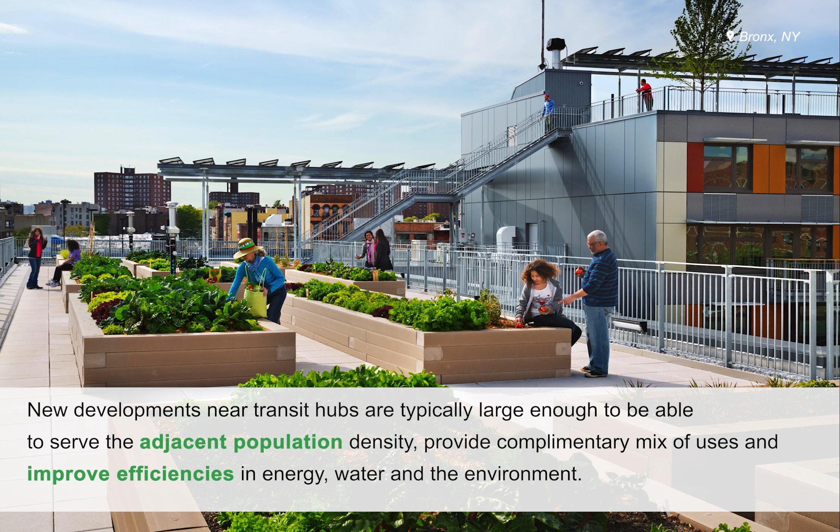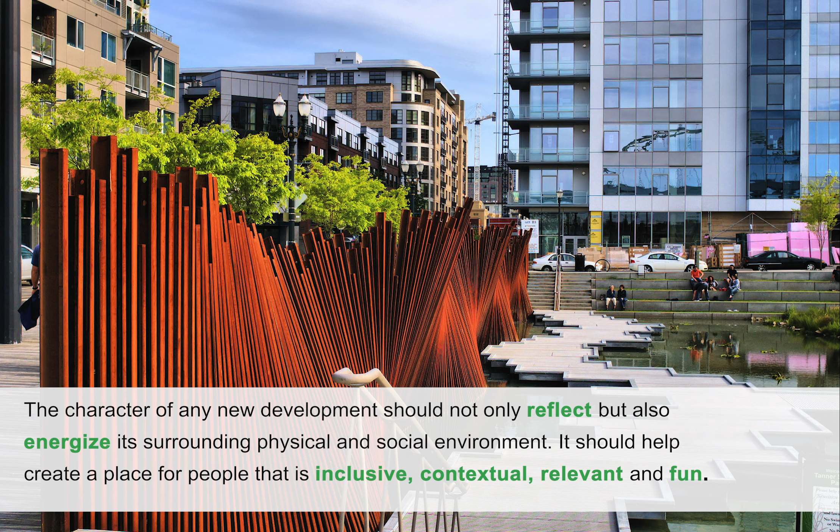These areas can be designed compactly, mixing uses in order to save energy and water, and can house riders and provide them and others in the community with a mix of services and amenities that they need for daily living and special occasions. New development, wherever it's located, should improve the physical, economic, and social environment. It should serve and include the full range of people that already live nearby and welcome others.

The two primary processes that regulate the use of land in our communities are planning and zoning. In planning, cities and counties describe their visions for the future, set goals for future actions, and establish policies and implementation programs to make desired changes happen. Zoning complements planning and includes a set of more detailed land use tools that regulate development on specific parcels of land.

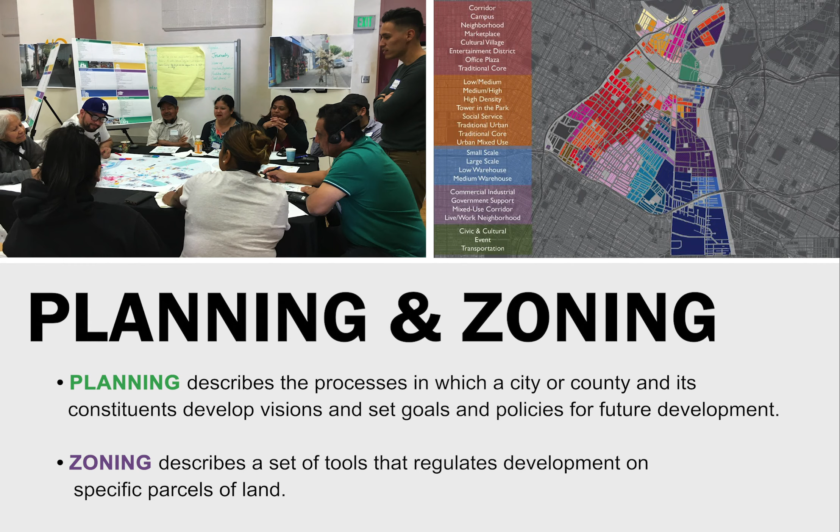Cities and counties in California are required by the state to adopt general plans. These long-term plans serve as the local government's blueprint, guiding the community's vision of future growth. By law, the general plan is required to be updated periodically. While there's no requirement for precisely how often the general plan should be updated, the planning period has traditionally been 15 to 20 years. Each of the 9 or more elements of general plans can be updated individually.

California law mandates that local jurisdictions' general plan elements address land use, circulation or mobility, housing, open space, conservation, safety, noise, environmental justice, and air quality. Some jurisdictions also choose to address subjects like community health, equity, and economic development in their general plans. Next, we describe a few of the backbone elements of the general plan in more detail.

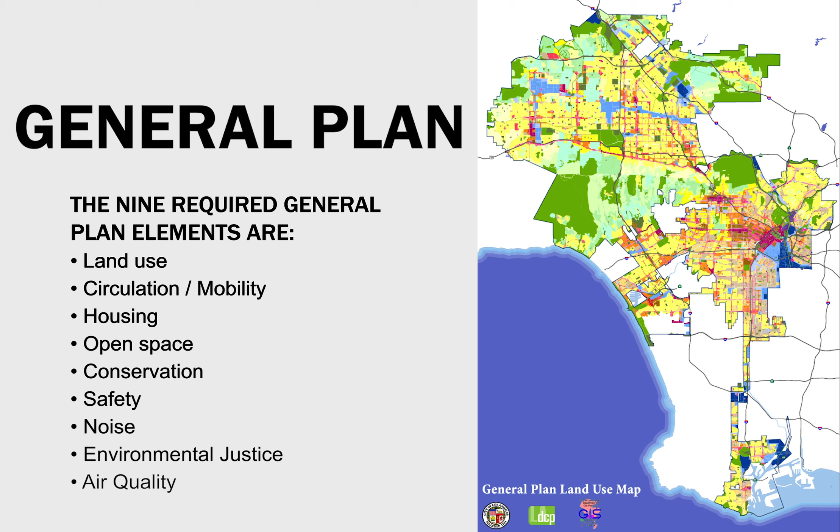The land use element of the general plan must depict the general distribution, location, and allowable intensity of use for all land uses including housing, commercial and industrial land, open space and conservation lands, parks and public facilities, and agriculture lands. The designation and mapping of these land uses is based on the shared vision of the community's future.

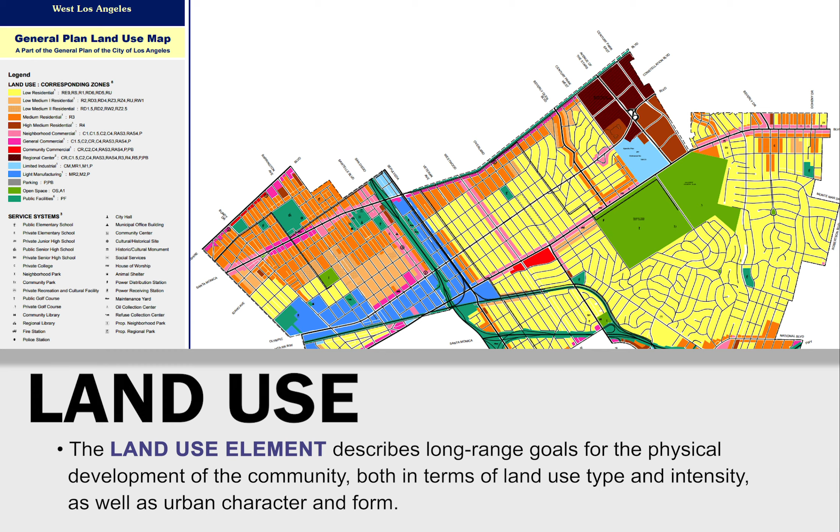The open space element of the general plan identifies land that is generally undeveloped and may provide value for recreation, health, habitat, biodiversity, wildlife conservation, aesthetics, economy, climate change mitigation and adaptation, flood risk reduction, managed natural resources production, agricultural production, and protection from hazardous conditions.

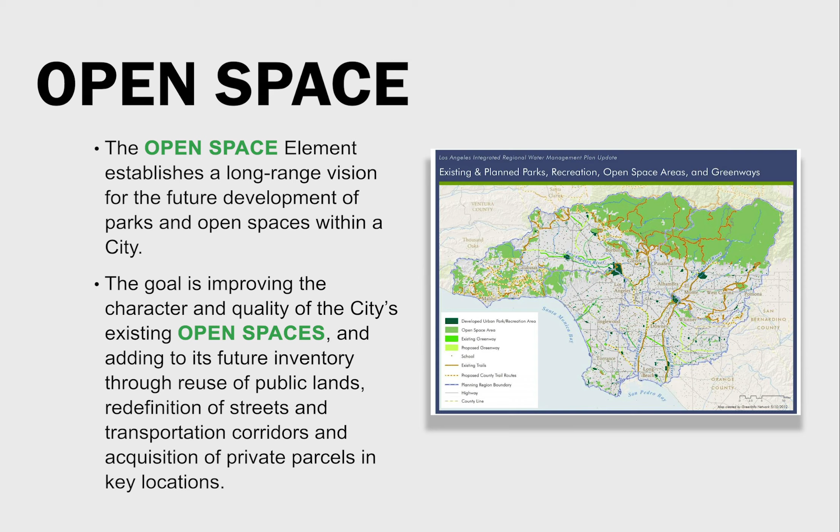The housing element of the general plan implements the state law that the availability of housing is a matter of vital statewide importance, and the attainment of decent housing and a suitable living environment for all Californians is a priority of the highest order. The law requires that the State Department of Housing and Community Development, HCD, review and certify the housing element and that local jurisdictions submit annual progress reports. The housing element must be revised and submitted periodically on a 4, 5, or 8-year cycle.

As part of the housing element, jurisdictions must address the production of housing that is affordable for households that are at and above median income, as well as those that are low, very low, and extremely low income.

The mobility element supports connectivity in complete communities by describing access to a range of mobility systems and choices, including buses and trains, cars, walking, biking, and rolling on other wheeled devices. Newer mobility choices are challenging the traditional idea of streets as mostly places for cars and buses. This is causing new challenges for planners to accommodate increasingly popular modes of travel, including skateboards and scooters, which may not easily fit either on sidewalks or in streets.

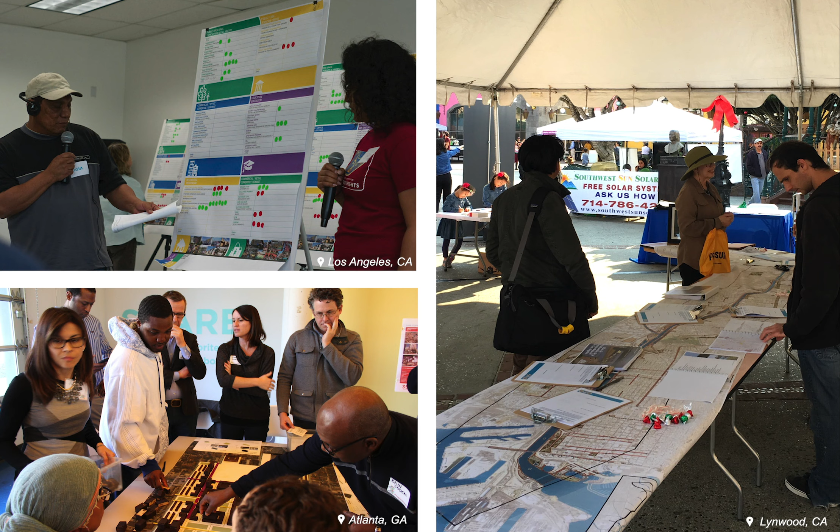In addition to mandating that a range of topics are included in the general plan, state law also requires the local planning agency to provide opportunities to involve the community. The law also requires that a jurisdiction make a diligent effort to include all economic groups when drafting, adopting, and implementing its housing element. While state law requires stakeholders to be informed about the process, many communities choose a deeper engagement by involving, collaborating with, or even empowering stakeholders to participate.

Fine-grained planning for specific areas or communities within a city or county's general plan can be addressed by community plans. For example, the city of Los Angeles, at roughly 500 square miles in size, has 35 community plan areas, each of which is a part of and must be consistent with the city's general plan.

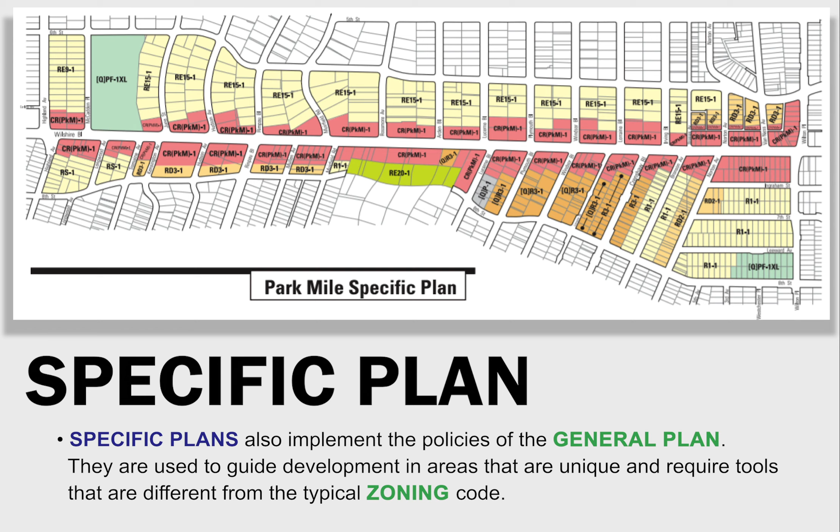Specific plans also govern smaller, unique areas within a city and must also be consistent with the city's general plan. Specific plans are different from other plans because they include both planning and zoning tools, which are usually found in separate documents. In addition to setting out a vision and goals for an area, a specific plan must address land use, circulation, and infrastructure needs.

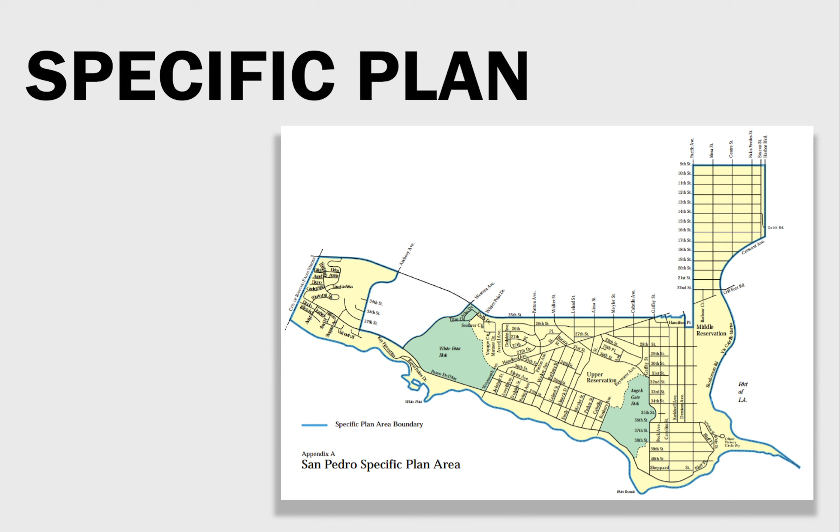Specific plans come in many different shapes and sizes. Some cover a neighborhood, others focus on a length of street, often called a corridor, while still others focus on the area around a transit station. Design guidelines may govern land use, such as those adopted in the city of Los Angeles to guide commercial and industrial development, urban design, architectural design, or even the design of complete streets.

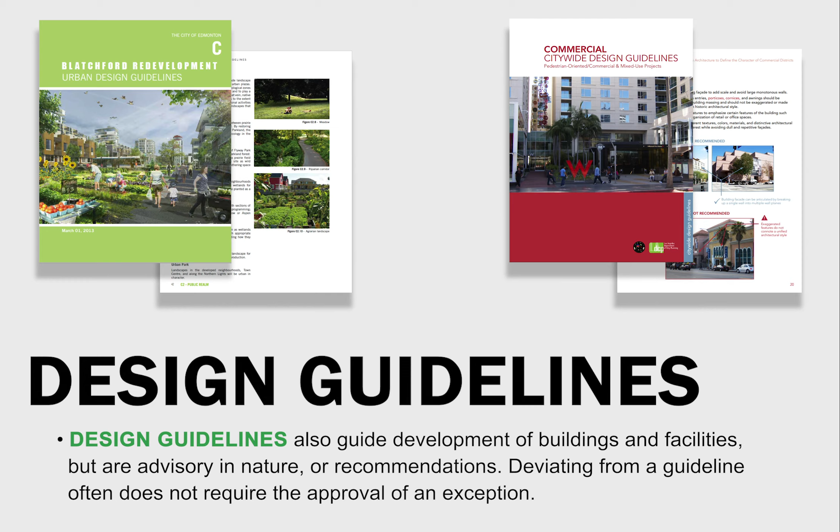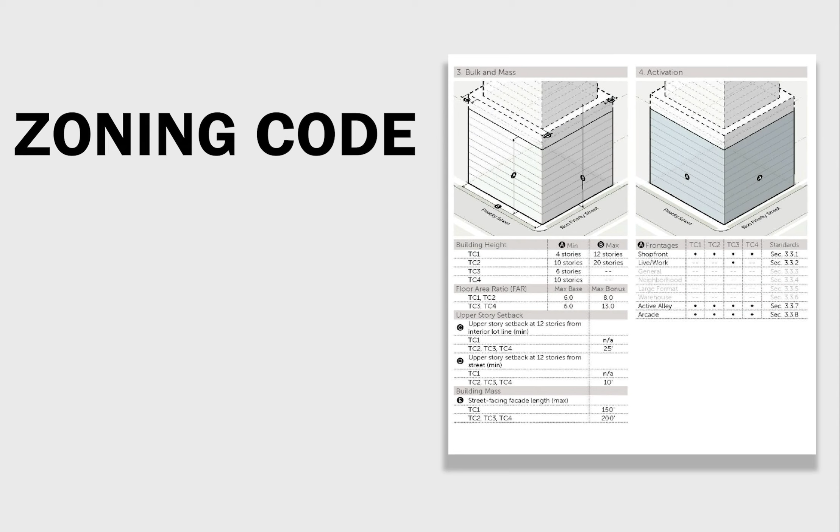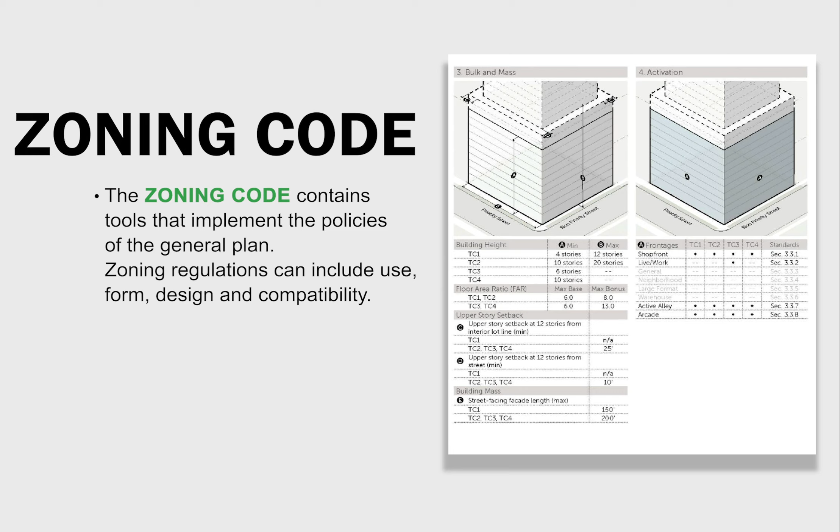The zoning code is an adopted part of the city's overall municipal code or local law. Zoning implements the goals of each of the more specific land uses in terms of uses, form, design, and compatibility. Zoning must be consistent with the general plan. Zoning designations address a range of development standards which traditionally combine to define one zone of land use.

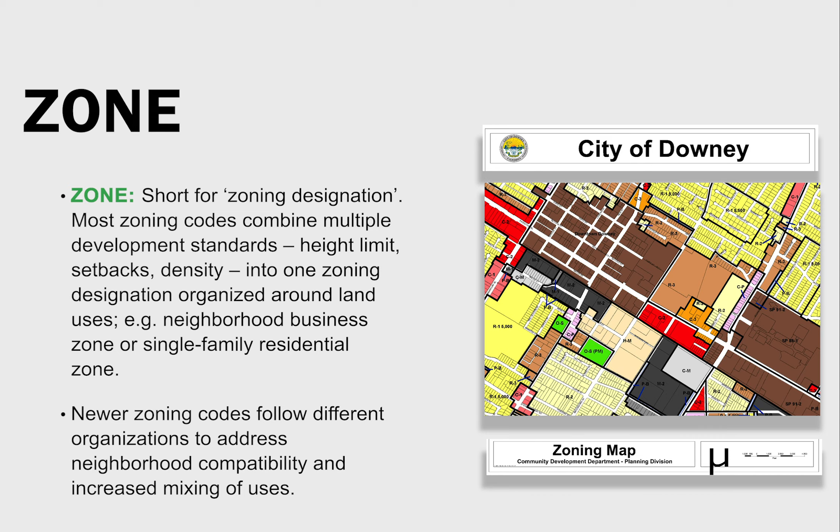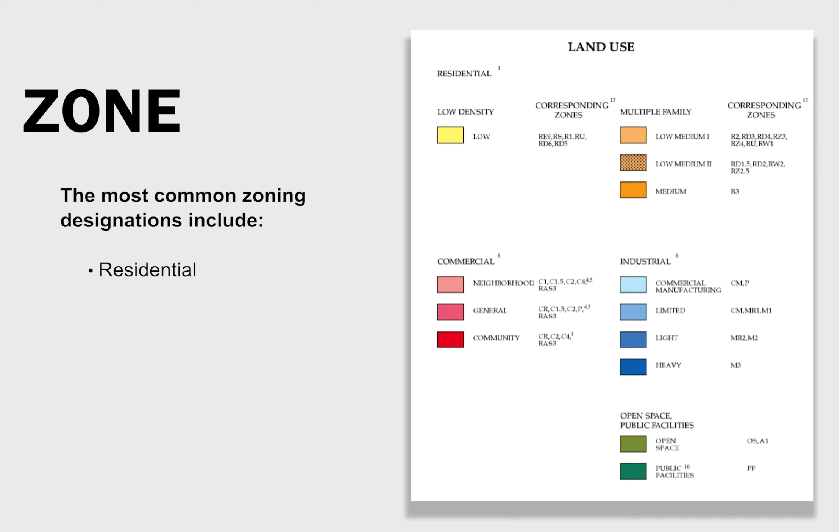New zoning codes sometimes address elements other than land use and density, such as the form that development should take, increased mixing of uses, and the way that development should relate to the street. Each zone or zoning designation in a city's code corresponds to a land use designation in a city's general plan. Zoning can address the range of uses, including single-family and multiple-family residential, commercial, industrial, public, and open space uses.

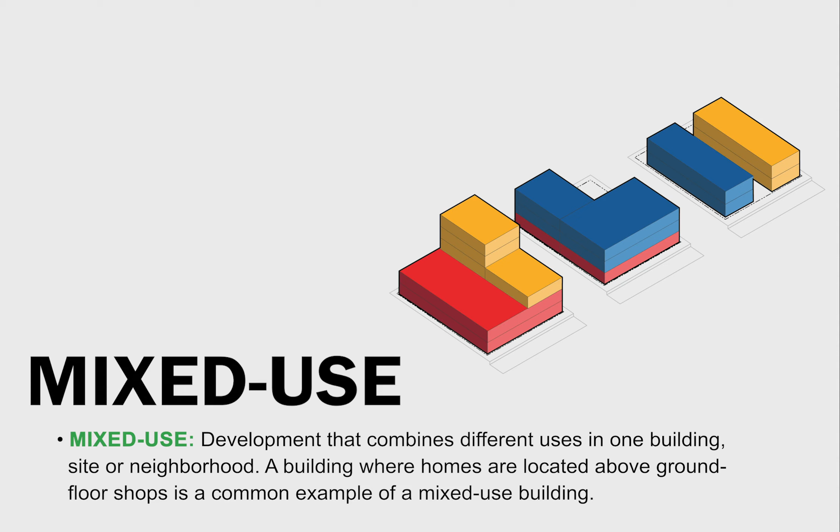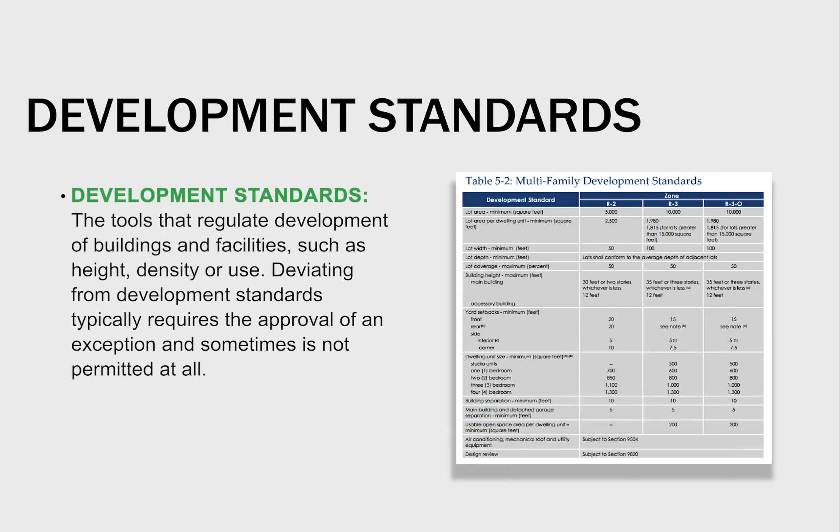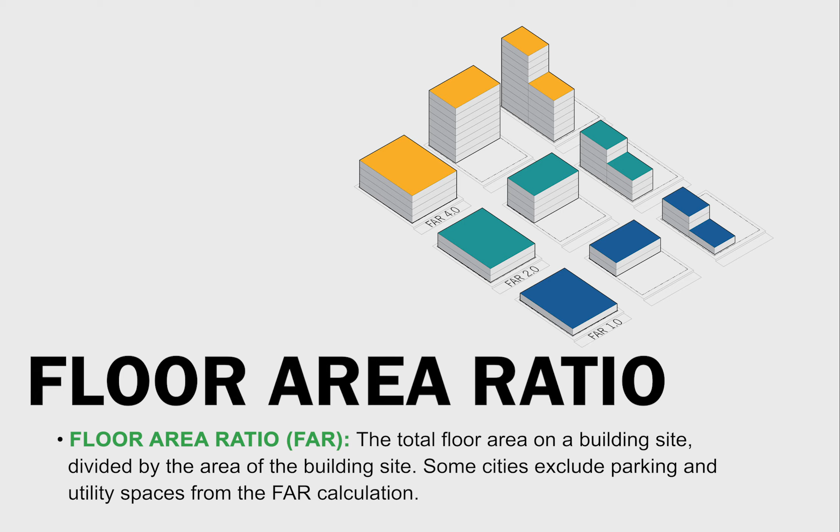Residential density is a term used to describe the number of homes allowed per each acre of land. Residential densities range from single-family density zones, which allow one dwelling unit per acre or per lot of a certain minimum size, to multiple dwelling unit zones, which can allow a wide range of dwelling units per acre.

A recent California law has taken effect that creates new opportunities for accessory dwelling units, also known as ADUs, backyard homes, or granny flats, to be built on residential properties. An ADU is a dwelling unit with a full kitchen and bathroom, which is an accessory use to a primary or main single-family residence and may be rented separately from the main residence.

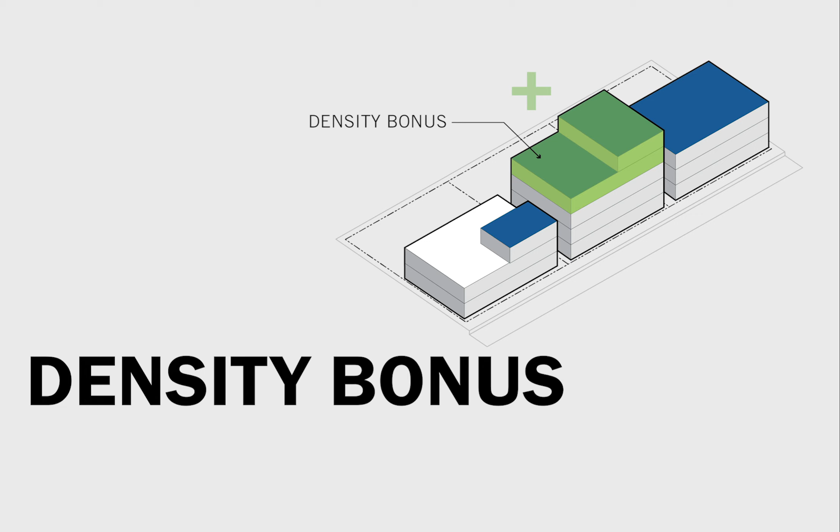To support the creation of a variety of housing, state law also requires that residential density bonuses are provided. Density bonuses provide developers the opportunity to build some percentage more housing units than is allowed by zoning if some of the housing being built is sold or rented at rates affordable to lower-income households, or if the housing is built for senior households.

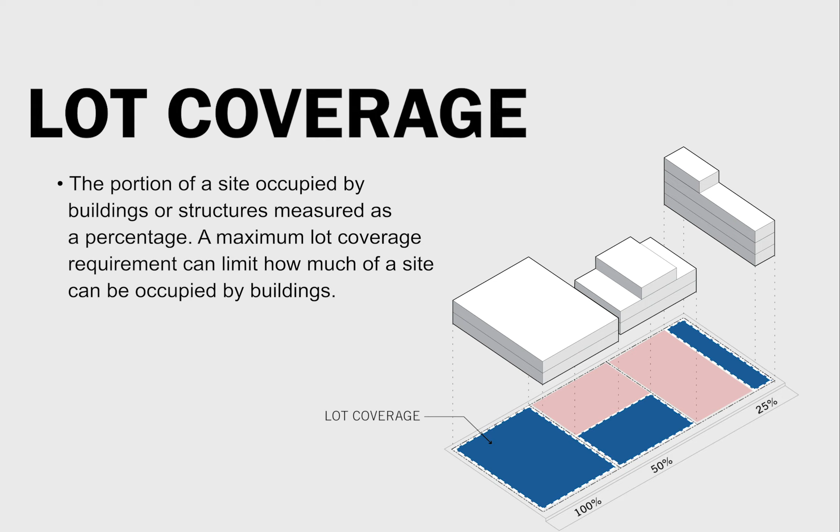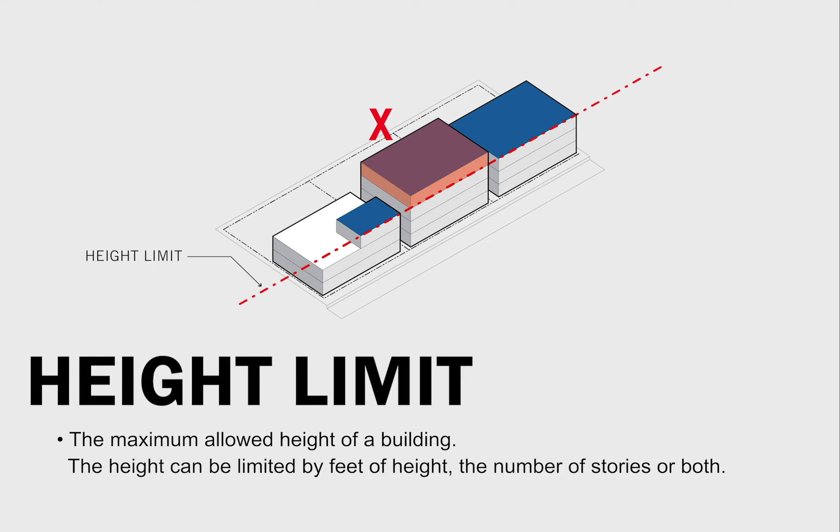The zoning code can also regulate lot coverage, or the percentage of a lot that may be covered by a building. Height limits in zoning codes identify the maximum allowed heights of buildings in various zones. A setback requirement is the distance a building is required to be set back from the property line or another structure. The setback area may also be called a yard.

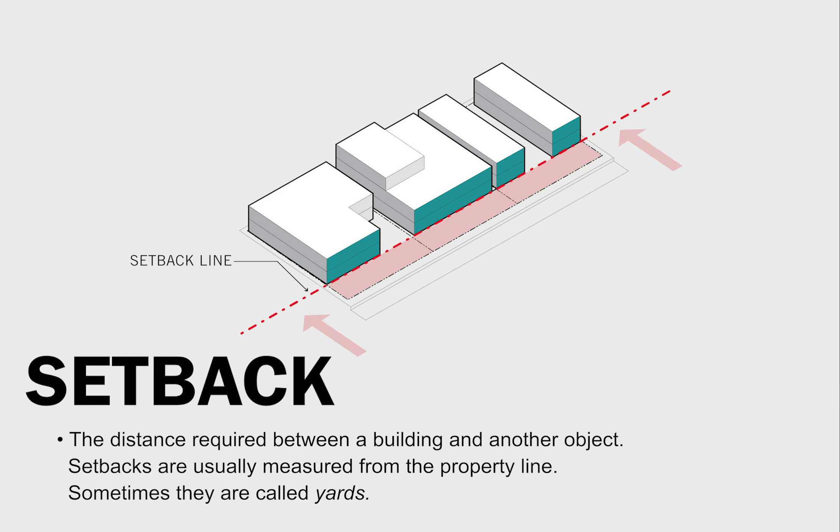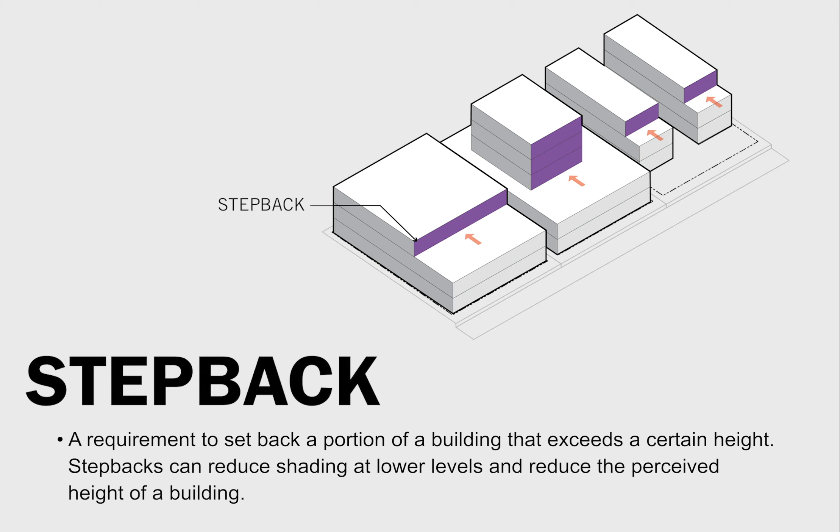A step back is a requirement to step back portions of the buildings on upper floors from the edge of the building, as shown in this illustration. Step backs can reduce shading and visual impacts at or near street level. The term building footprint refers to the area of the site occupied by a building.

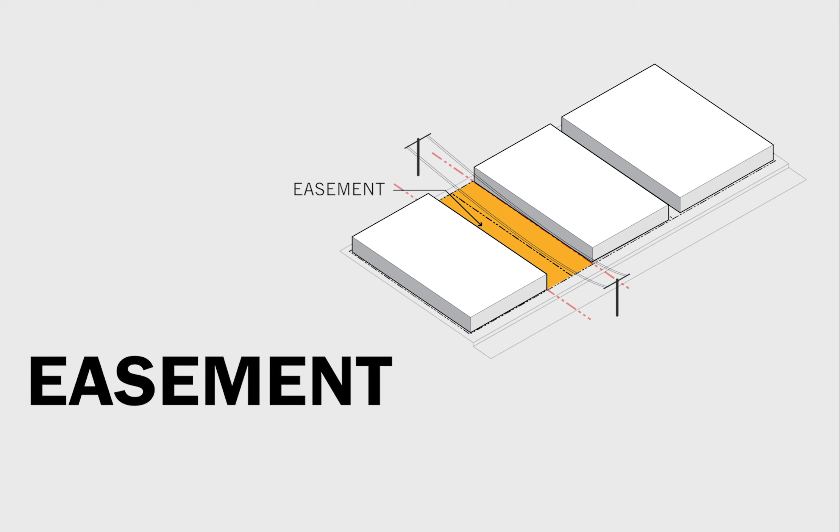Finally, while not necessarily part of the zoning code, easements also impact the ability to use land. Easements are legally required for things like water and electrical utilities and transportation in order to formally receive the right to cross or otherwise use someone else's land.

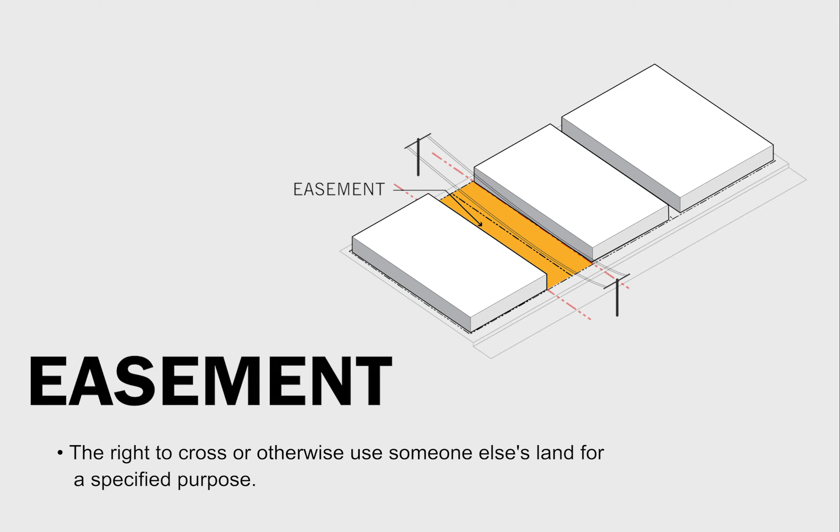The California Environmental Quality Act, known as CEQA, was passed in 1970 in order to ensure that development proposals consider and mitigate, meaning lessen or even eliminate completely, their environmental impacts. In the CEQA process, projects may be determined to be statutorily or categorically exempt. If a project is not exempt, an initial study of the project uncovers its impacts.

If the project has no significant impacts, then a negative declaration can be issued and the CEQA process completed. If there are identified impacts and they can be mitigated, then a mitigated negative declaration can be completed and reviewed. If the project will result in significant impacts that cannot be fully or even partially mitigated, then an environmental impact report is warranted.

Development projects are entitled or approved by obtaining a series of approvals from a local government agency, such as a city or county. Project approvals can proceed along two different tracks: discretionary approvals or by right development projects. Discretionary approvals are granted only at the discretion of governing bodies. These are necessary when projects require exceptions to regulations that require judgments based on review.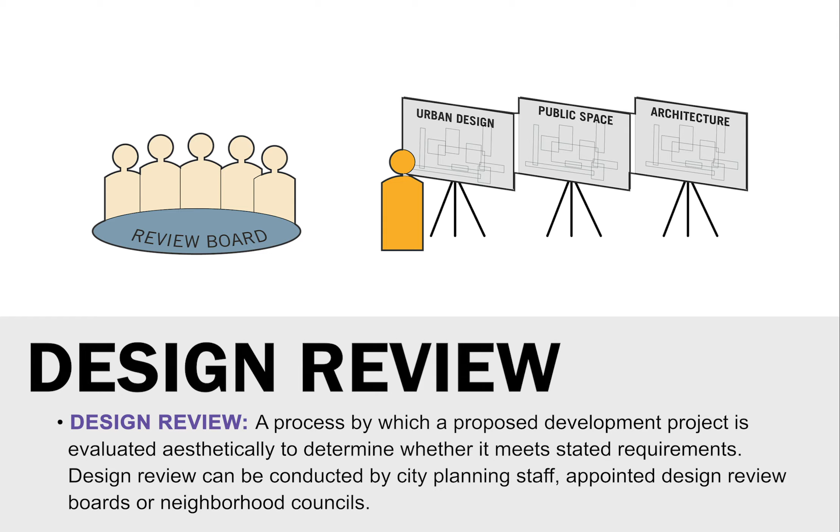Community planning affects the lives of individuals and communities as a whole and can help ensure equitable access to housing, services, and amenities for all. Communities designed with sustainability in mind can have a positive impact on our environment and economy, benefiting all of us. Incorporating healthy features in communities can improve physical, mental, and social well-being for all of us as well.

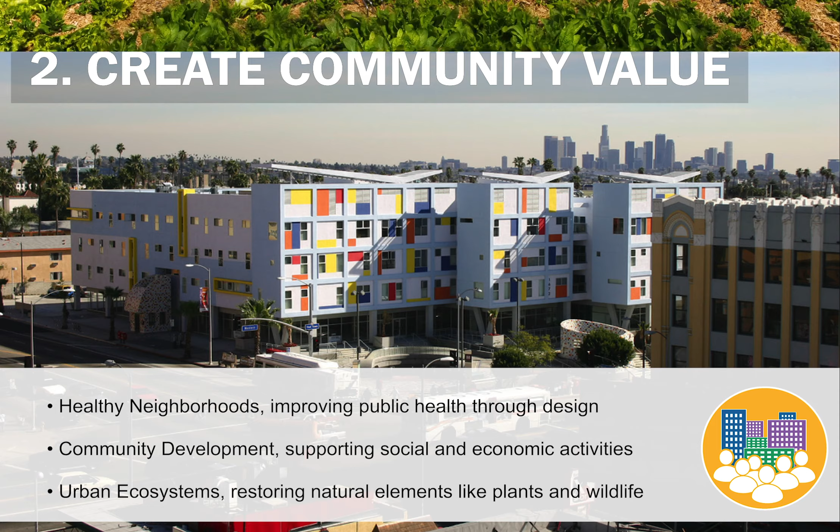Complete communities connect people and places and encourage interaction between people. Complete communities also provide people with choices and ways to get around, including walking and biking. Complete communities also create economic, environmental, social, and physical value. Finally, complete communities conserve our precious environmental, social, and cultural resources. They enhance the world instead of making negative impacts on it.

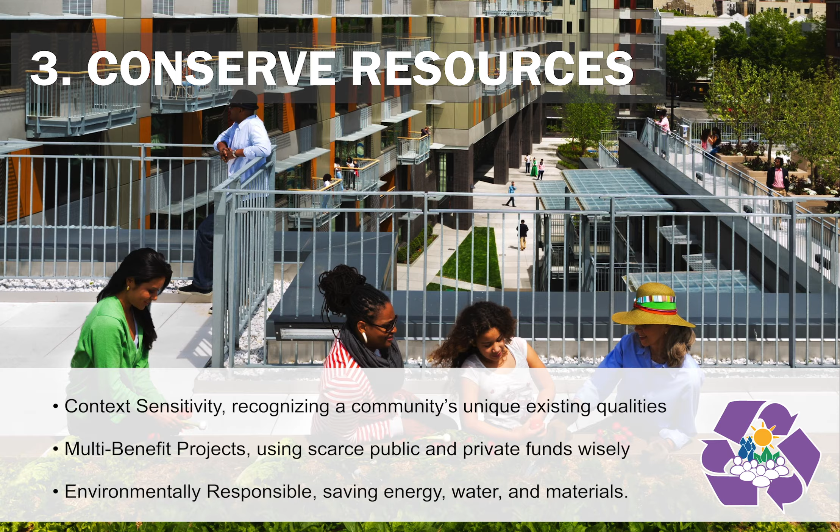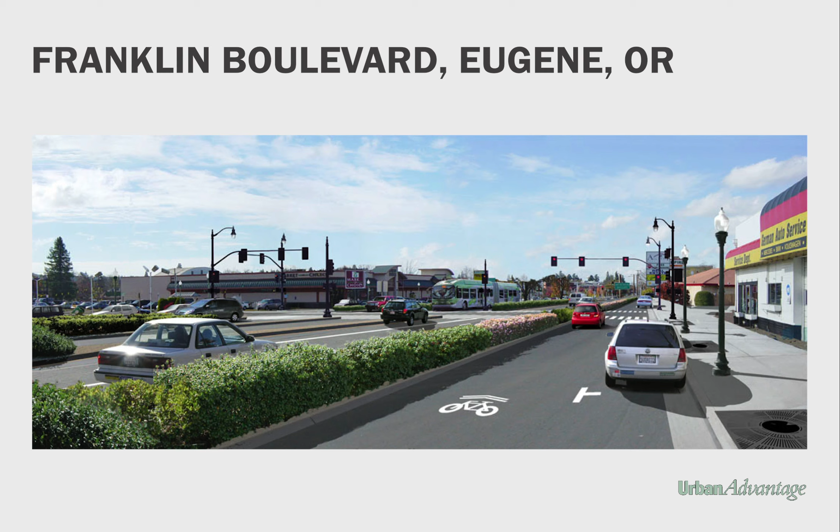This typical street can be enhanced over time to become a more desirable place for people to live and work. A shorter distance to walk across the street and well-marked, highly visible crosswalks are safer and more attractive to pedestrians. Adding bike lanes on the street also serves to accommodate more visitors, narrow the roadway, and slow traffic. Adding street trees can enhance the community's environment by providing shade and reducing energy use in buildings.

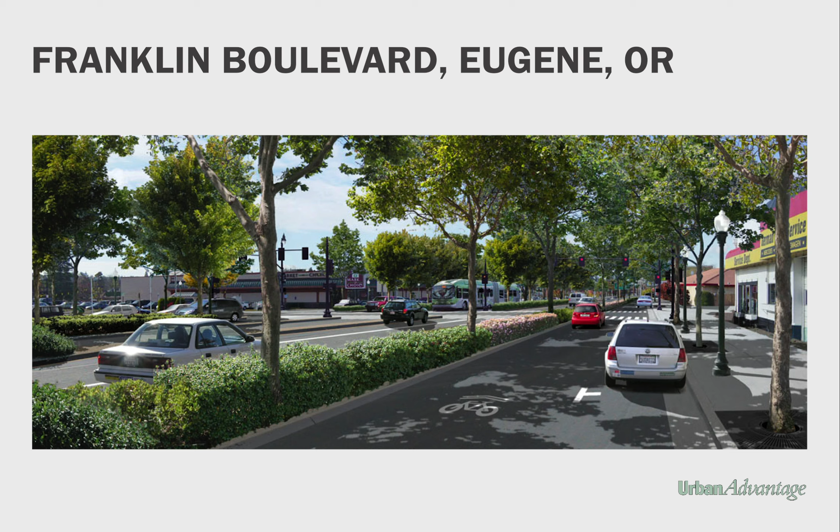Adding lighting and landscaping on the street can enhance the perceived safety and attractiveness of the area. Over time, upper stories can be added onto buildings on both sides of the street, gradually turning one-story main streets into 3- and 4-story main streets that create a sense of place. Ideally, new development will include housing that serves a range of household income and types.

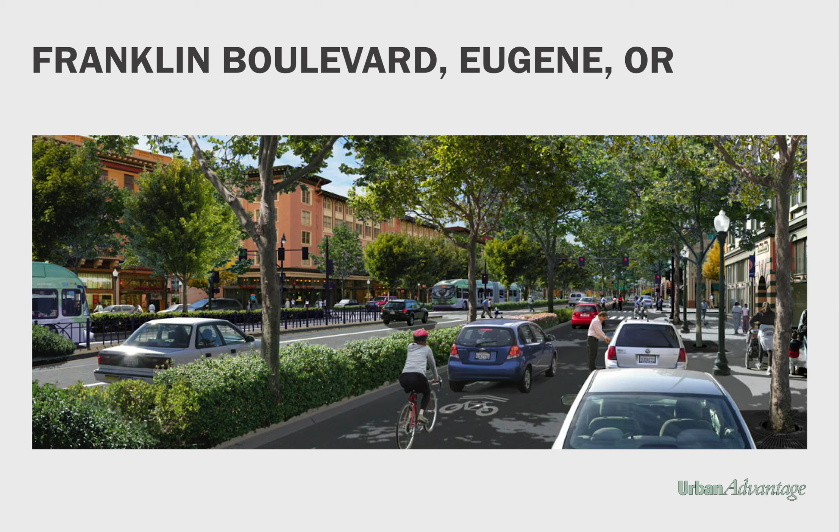Adding well-designed buildings can enhance the street wall and attractiveness of an area and add places for people to live in walkable neighborhoods with shops and services that spill out onto the sidewalk. Development and more opportunities to work and live can spread from the center on both sides of a street to enhance it further, incorporate more mobility choices, and complete the community.

Now that you have additional information about community planning, you may also be interested in related presentations about 2 other important aspects of creating complete communities: urban design and architecture. Each of these 3 components is defined, described, and illustrated in these presentations sponsored by LA Metro in consultation with the American Institute of Architects.